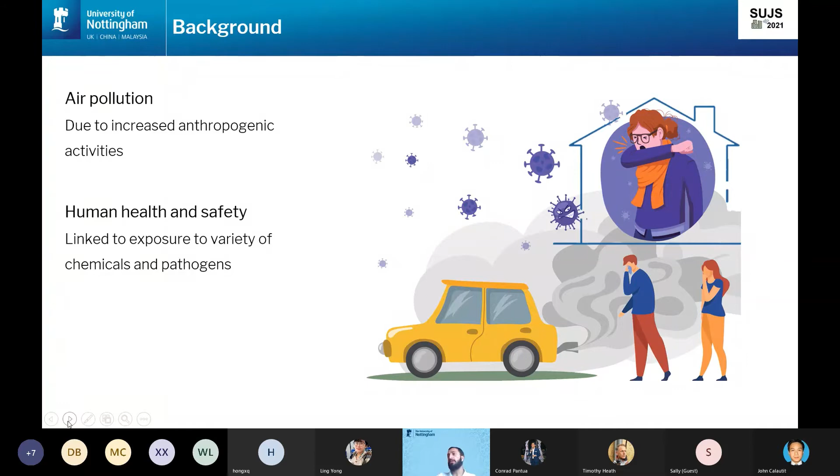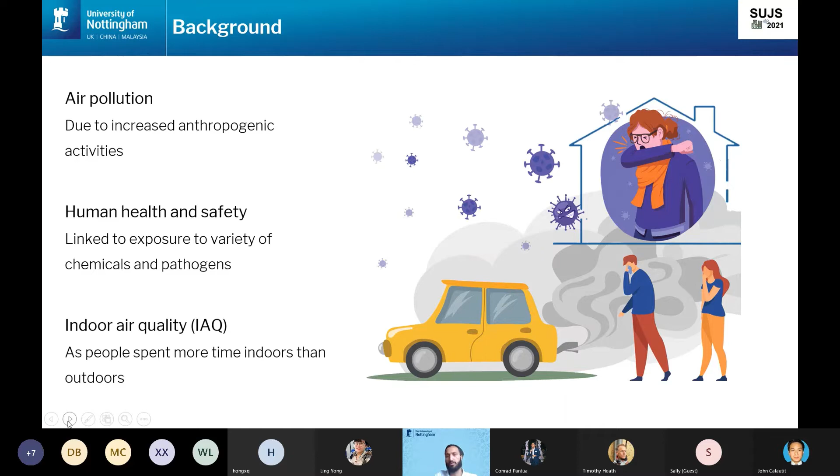Air pollution is gaining increasing importance, and no doubt it is, because there are higher anthropogenic activities and poorer air quality than previous years, so it is impacting human health and is a hazard for many people in the entire population in cities. And amongst all pollution spaces, indoor air quality is most important, as people spend a significant amount of time indoors, and the pandemic has also accentuated that fact, transitioning the work environment into indoor spaces.

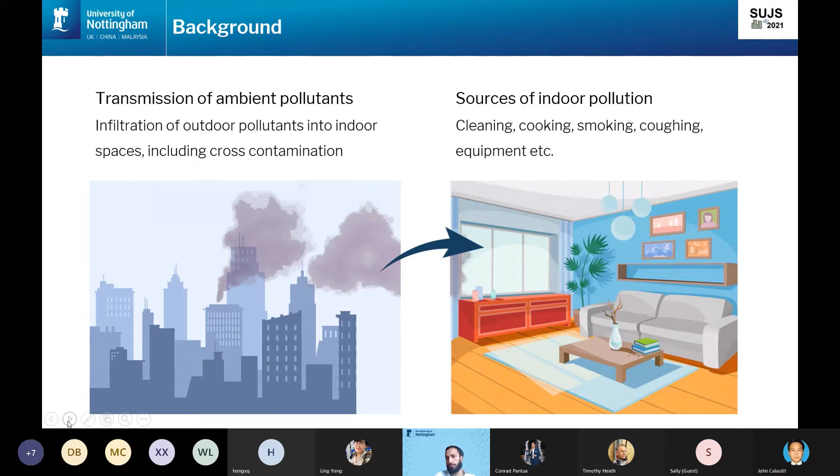So in the figure on the right, you have an indoor space. It could be exposed to its own sources, including human activities, cleaning, smoking, or mechanical equipment. At the same time, it is also exposed to transmission of ambient outdoor pollutants into the indoor spaces. That could be happening through windows or cracks in door and window frames, or through the pores in the building fabric, and there are other mechanisms of transmission. So an indoor space is always exposed to multiple factors of pollution transmission.

My research showed that in a typical urban canyon, you have various factors affecting how pollutants are dispersed, including prevailing wind direction, solar radiation, the flow separation or flow recirculation inside the canyon, local canyon elements including trees, pedestrians, cars, and so forth, and the mode of ventilation in the buildings themselves, including natural, mechanical, or infiltration modes. So all of these factors influence how the indoor space interacts with the outdoor space.

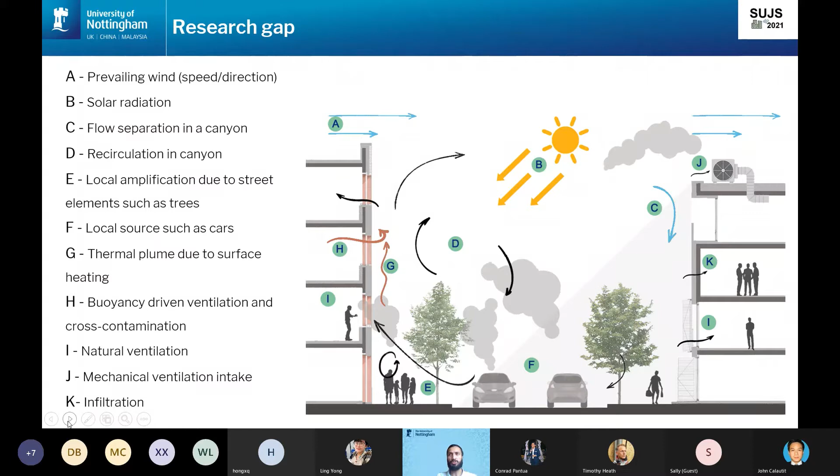And depending on the extent of each factor, for instance, a higher wind speed above the canyon could lead to a decoupled airflow, and you have less dispersion of pollutants inside the canyon. Suffice to say that the indoor spaces will be more polluted.

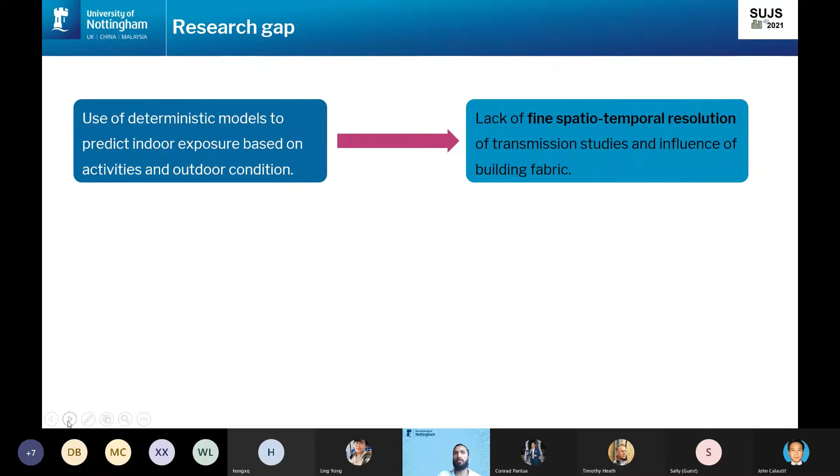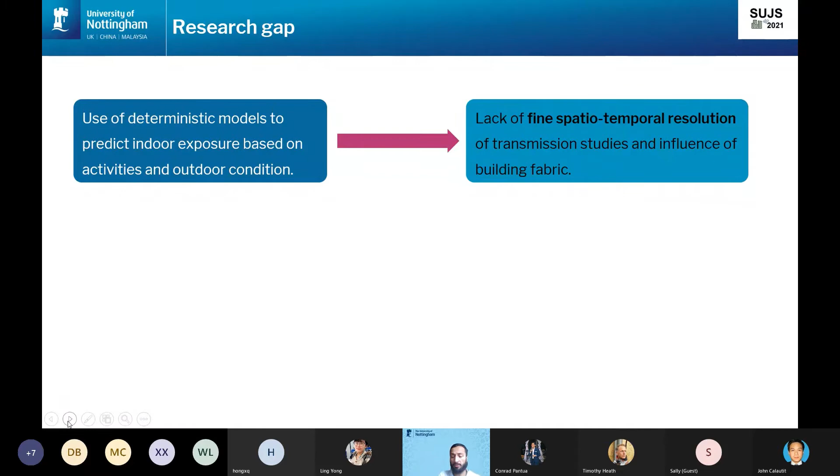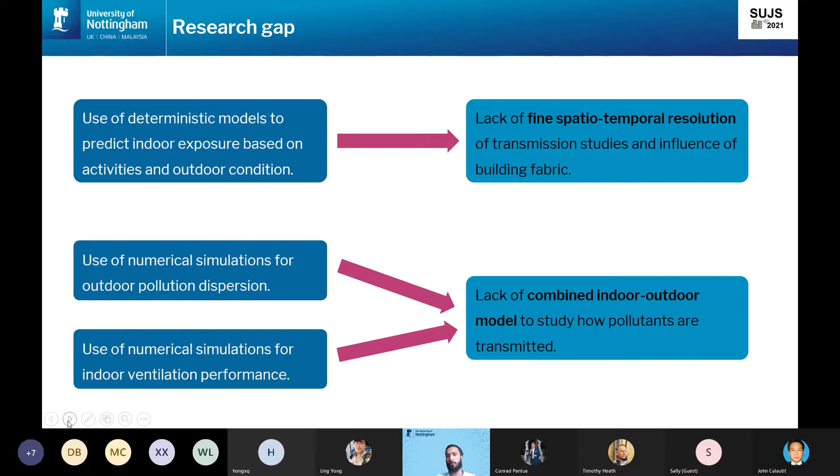The literature has revealed that currently we use deterministic models or mathematical tools to predict how people inside indoor spaces would be exposed to outdoor pollutants. So essentially there is a lack of finer spatio-temporal resolution of investigation assessing how building fabrics would affect this transmission. Additionally, many CFD studies or other numerical investigations either look only at outdoor dispersion or only at indoor ventilation, and there are very few combined studies which could give us a better clue of how indoor and outdoor spaces are interacting with each other.

So that has been the main objective of my study so far, wherein I'm investigating transmission characteristics between the two environments and the role of other environmental factors, including the urban layout, the temperature in the canyon, the solar radiation, wind speeds, local elements, and so forth. And knowing this, one can then effectively plan intervention strategies to limit this contamination.

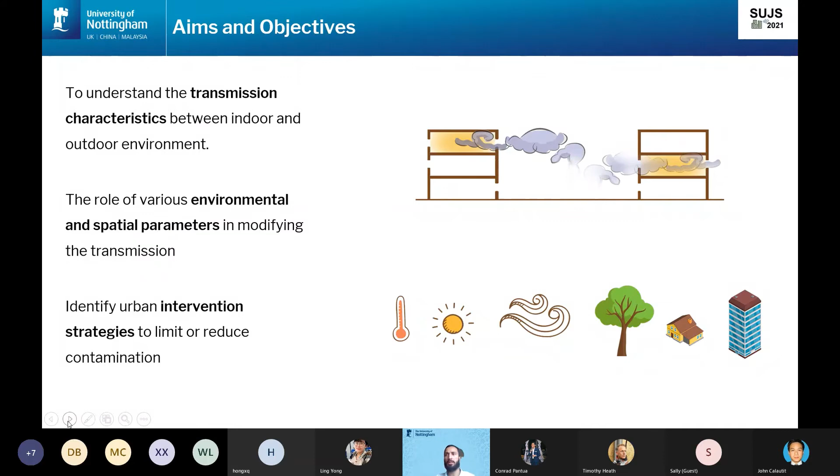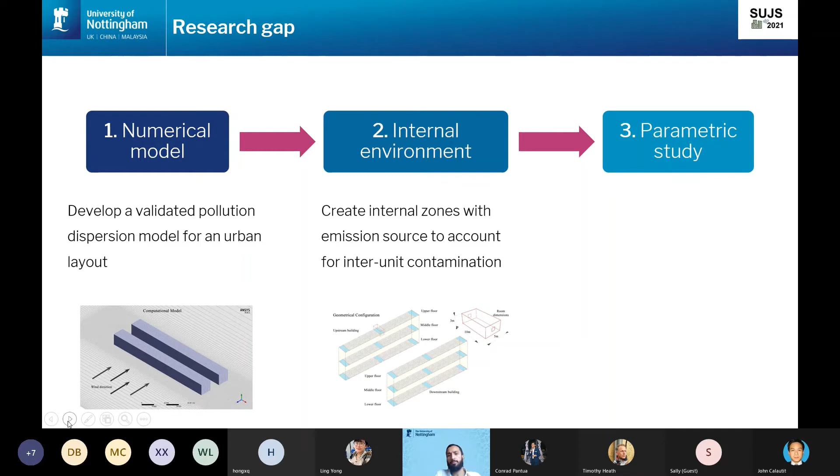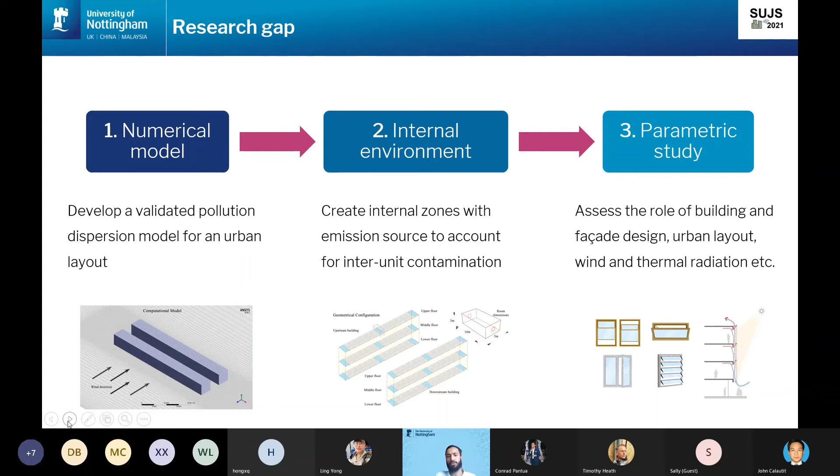So I followed a three-step method to investigate this. The first was to develop a numerical model of a typical street canyon and see how dispersion occurs. Then we put in the internal indoor spaces with polluting sources. And then you do a parametric assessment of different elements to assess which factor is most prominent in transmission.

So these are some of the results from a few ventilation strategies adopted in a typical canyon. In the base case, street pollutants are accumulated in the leeward facing canyon wall, which has been widely explored, and the results have all suggested this. However, opening windows in those buildings could alter the pollutant concentration inside the canyon as well as the indoor space as well. So, for instance, in cases 3, 1, and 2, where the building is ventilated from either the windward side for the windward building, or the building is facing in the other direction, of course the pollutant transmission will be less.

But in case 2, it's been widely seen that natural ventilation or cross flow of air helps prevent outdoor pollutants from moving inside your indoor space, and at the same time it can dilute the pollutants inside the canyon. The worst case, however, was case 4. It's one where side ventilation is predominant for both buildings, and they are ventilated from the canyon side. So essentially all the emitted pollutants inside the canyon are accumulated indoors. And case 5, however, is the best case because both buildings are cross ventilated, ensuring least transmission.

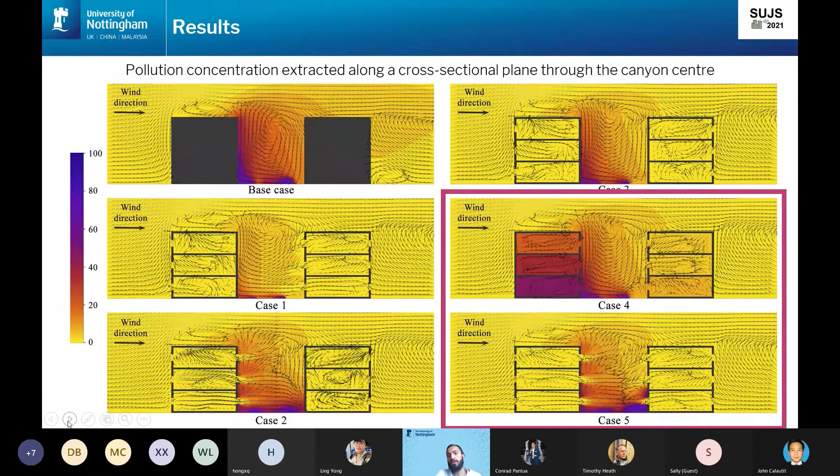So I decided to explore case 4 further and investigate how an indoor source in particular would impact other internal environments. So for instance, now imagine instead of cars outside, the pollution source is the room itself. You can imagine this as a person coughing, or another indoor activity. And in these cases, there's a difference in transmission characteristics. So the downstream building affects the lower floors on the same side, whereas the pollutant source located on the upstream building affects the floors above it.

Yesterday, there were a couple of speakers discussing the findings on transmission of the COVID virus, and a reference was made to the SARS pandemic earlier in Hong Kong. So the findings are quite similar and in line with them. However, I go further in exploring how other factors could also impact this transmission. So for instance, if you introduce cross ventilation in a typical canyon, then you are sure to impact the local environment, the public environment, the road level or the canyon, but you limit the transmission of pollutants released at one internal space to other indoor spaces.

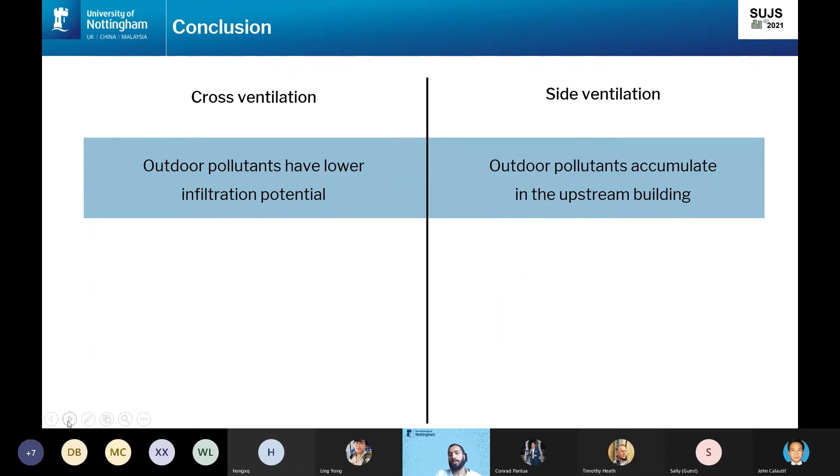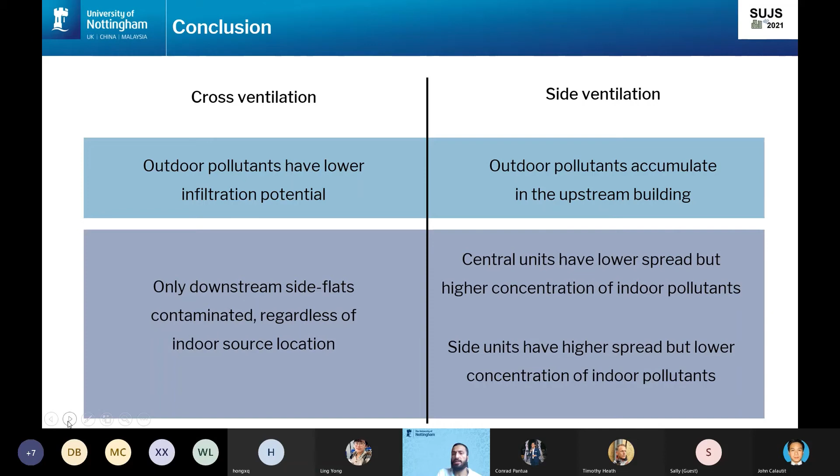However, the common space, the outdoors, is significantly impacted even in this form of ventilation. So intervention strategies should be designed to limit this transmission or improve the outdoor quality within the canyon. So typically cross ventilation prevents outdoor infiltration. However, it can accumulate outdoor pollution in side ventilation. In terms of indoor contamination, cross ventilation mode can accumulate pollutants slightly inside side flats, but not in the centrally located flats. However, for side ventilation, central units can lead to accumulation in the central region of the canyon, whereas side units spread the pollutants throughout the canyon.

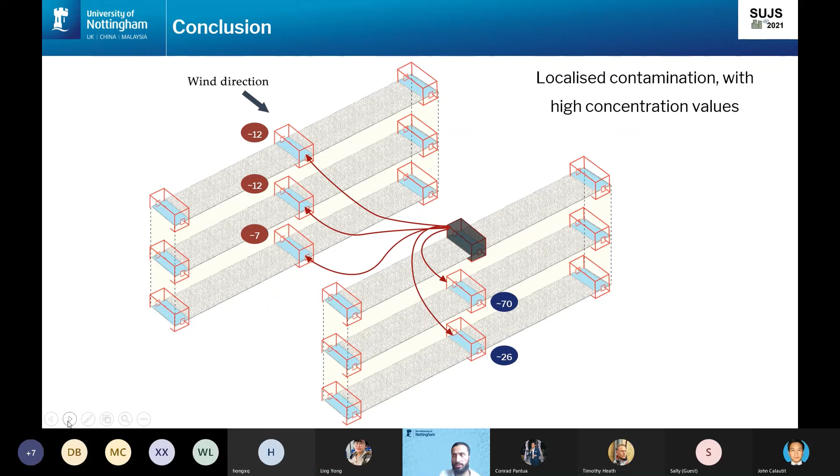So a graphical image should explain this more clearly. So imagine a polluting source located on top of a downstream building. The emissions from that source can significantly contaminate all the units located near the center of the canyon, especially ones located just below it. However, if this polluting unit is located on the upstream building at the far corner, then although the transmission occurs into the canyon and other regions, the concentration is much less.

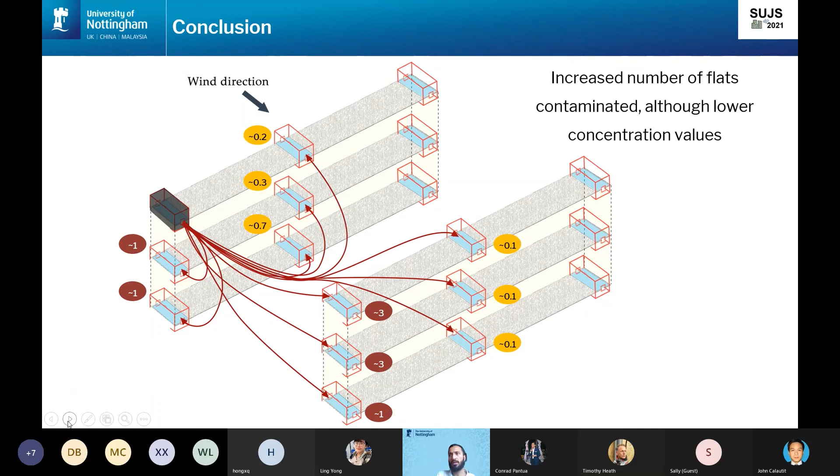So depending on the pathogen or the pollutant we are dealing with, a strategy should be designed to limit that kind of pollutant. So for instance, in a pandemic when you have a pathogen or virus, transmission is also dependent on the time it takes for that pollutant to leave a unit and enter another unit. So in that time, will the virus or pathogen become inactive? So in that sense, the transmission route in the case of a leeward located unit is quite long. Although the virus could be transmitted, the impact would be less, as its potency has decreased significantly by then.

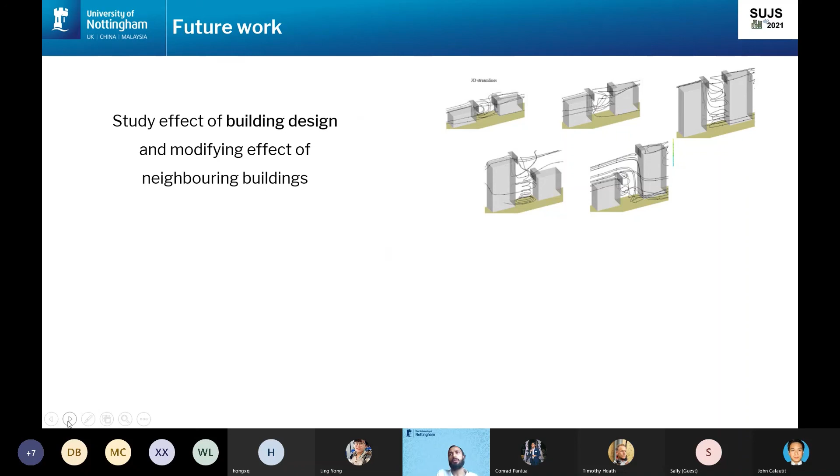So in the next steps I plan to investigate other building design or neighborhood design, and see how that can affect the transmission nature, and also introduce additional indoor spaces and indoor layouts, and see how that impacts the transmission in indoor spaces.